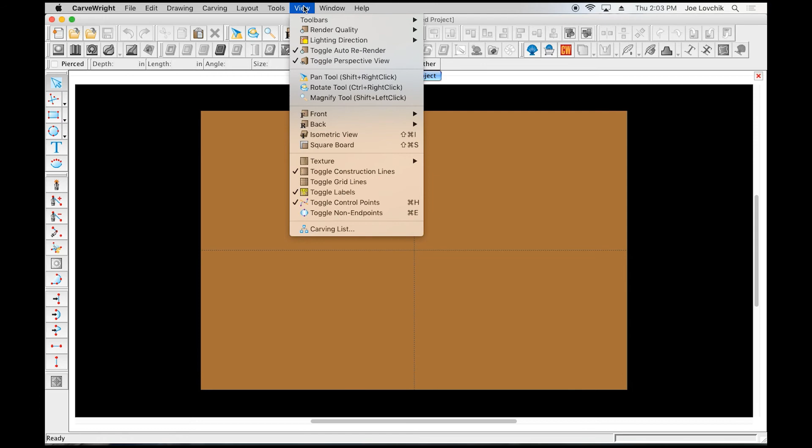So let's go and start by turning on our grid lines again, and let's actually go to layout and to snap, and let's make that interval 1/4 inch this time. Since we're using even numbers, these 1/4 inches divide perfectly evenly across this whole thing, which will be very useful here. And we're going to go up here to our snap to grid and snap to edge.

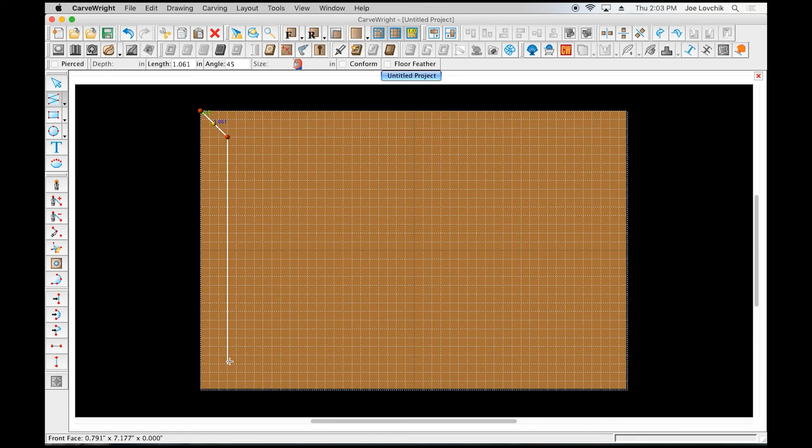And we're going to use our connected line tool, and let's go and define kind of a mitered section to a frame.

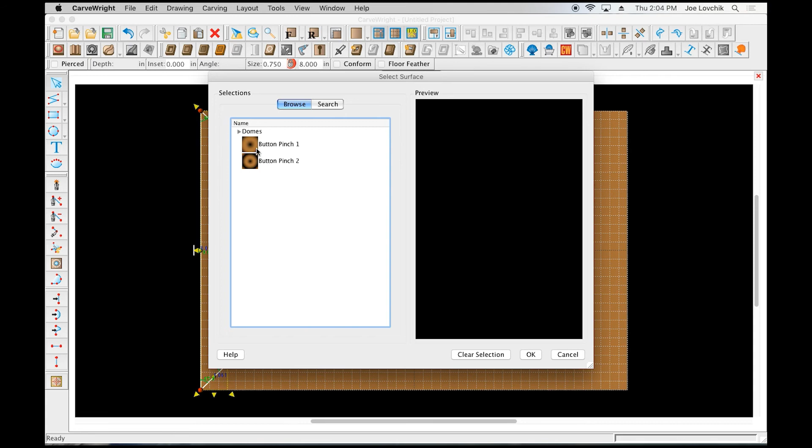Okay, so we've got this drawn shape right here that we can see, and let's apply a surface to this. So we've got this tool, it's right next to the carve region, and in between the select texture—both of those we've used—and select surface here. If you click on that, it's got a few selections of domes and other curve shapes that you can apply to things, and you can manipulate them over here to see exactly what they're going to look like.

And some of them are specific directional domes. So this one is curving from the top down. We're calling it a left dome, and then that's a right dome—it curves the other way. And since we're on this end of the board, let's take this one and apply it to this side of the board. Okay, so let's zoom in here and kind of rotate the board to see what we've got.

And it looks mostly just like kind of a flat area. You don't see a whole lot of dome to it. We're going to use our height tool. Let's enhance that by increasing that height. We'll take it to 999, which is the highest point that you can go in height.

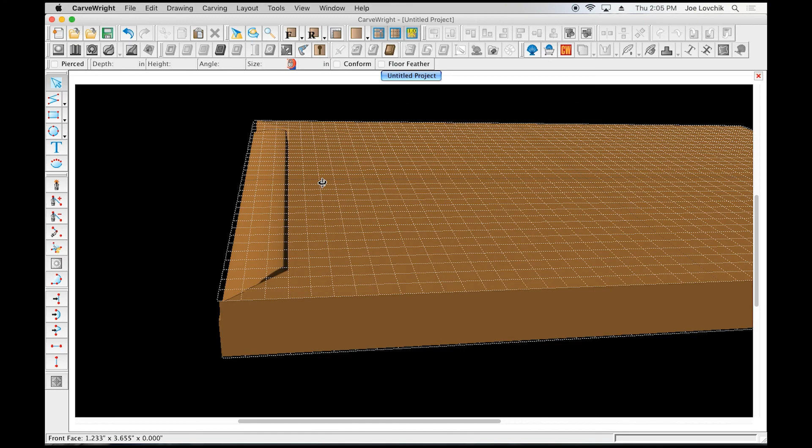And now you can start seeing that curve in the shape. Let me bring it up some more. But let's also lower that depth to 1/2 inch. And now we can really start seeing that depth.

Okay, click the F to snap it back to the front. Now we need to take this and do this to all 4 sides of this box lid, or this frame that we're making. Let's look at this—a lot of people,

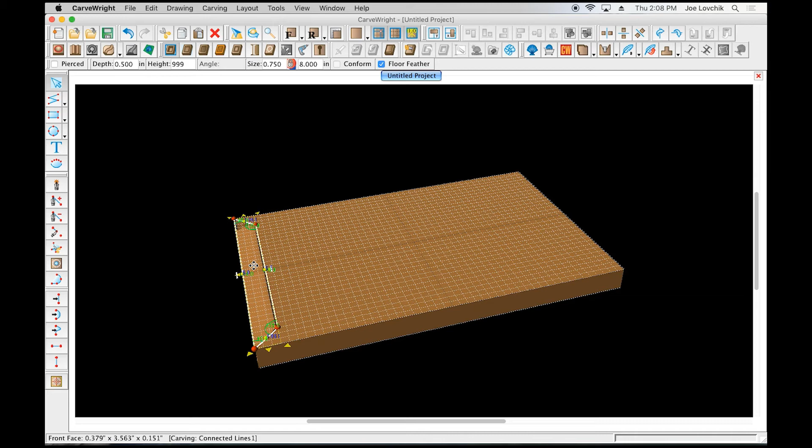their initial thought is to just mirror this, and if you do that, I'll show you what happens. Since we have selected a specific directional dome, you see that that same direction is used over here, so it's not actually creating a mirror of that. It's creating a mirror of the drawn shape, but the dome itself is not mirroring properly.

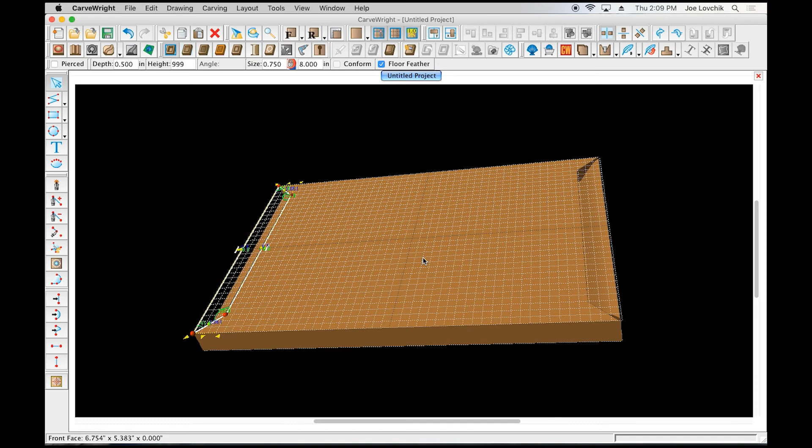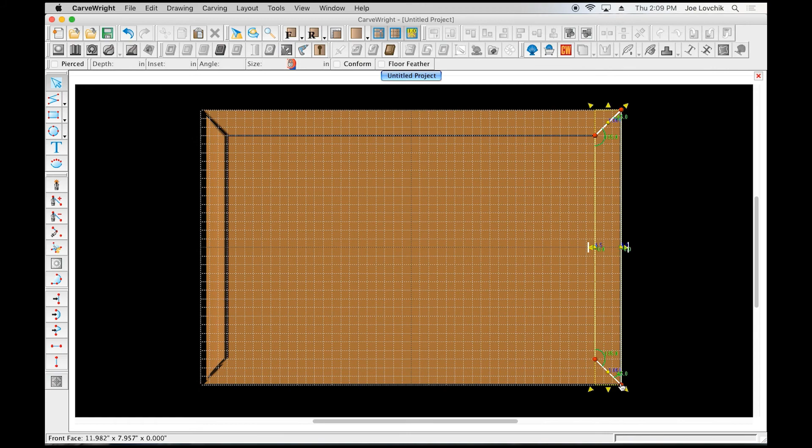So let's undo that and snap this back to the front, and let's just use our drawing tools to just draw in the rest of these shapes. And with this snap to grid, it becomes so simple to just draw all these shapes in very quickly. Make sure that they are closing, that you have closed shapes. Let me draw the last one in here.

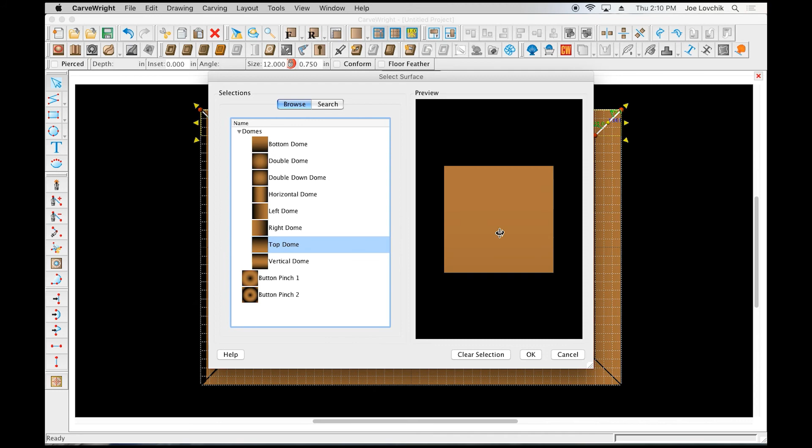Okay, let's just start at the top. We're going to go to select surface again, and then this time we're going to select the appropriate dome. So top dome, it's going from the top point down. And then we're going to select a 1/2 inch for depth, height at 999, and then just keep going around and doing the same thing to all of them.

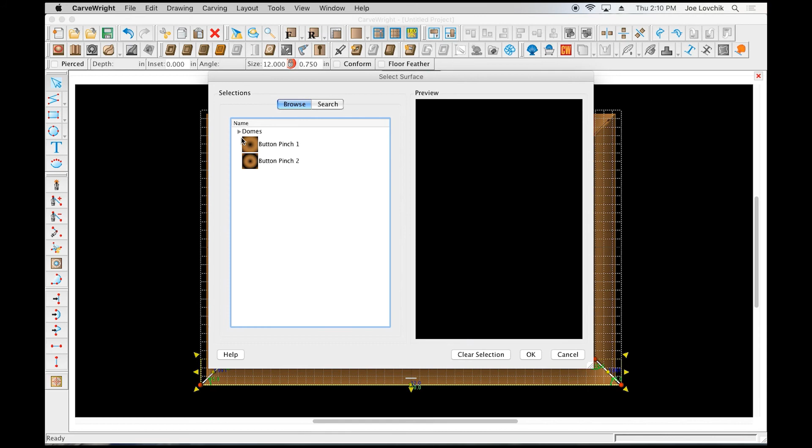So domes—this one is the right dome. Click OK. 1/2 inch, 999. Select this one, surface, and this is a bottom dome, right? Yeah. 1/2 inch, 999.

Okay, so now we can see we've got this shape wrapped all the way around. Now we're seeing some gaps show up here. There's a couple things that are happening. One, we've got to make sure that we do our optimization and make sure we turn that bit optimization to best. But you also see that there's a little lip edge here.

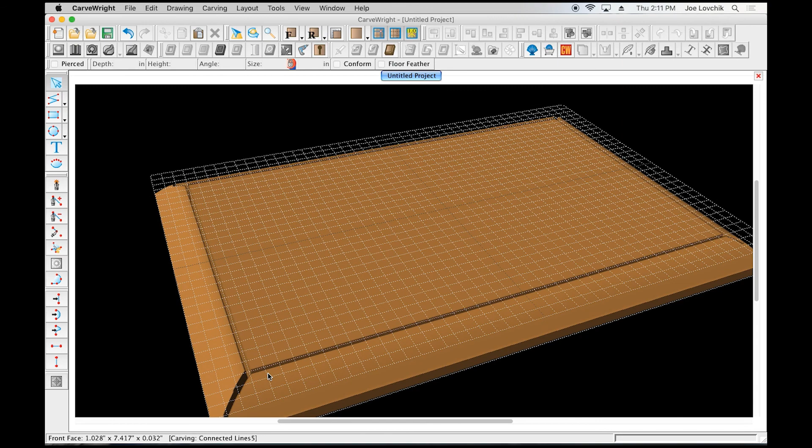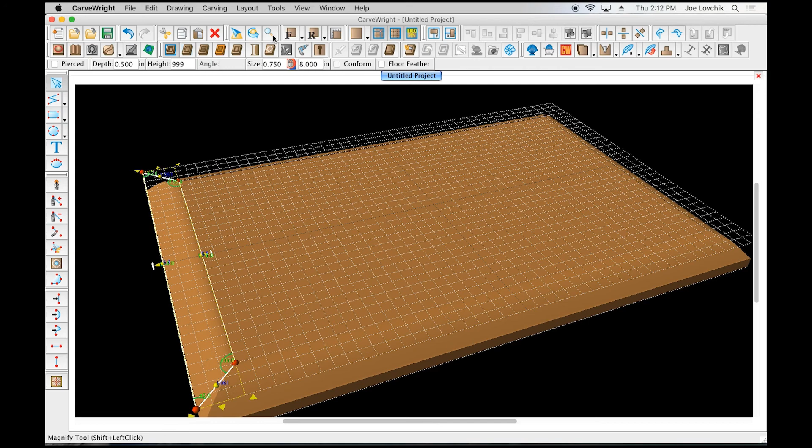So what's happening is the floor feather, and this is, I believe, just in the Designer Pro. Floor feather drops the edges—all the edges of the patterns—down to a consistent depth level, and that is so that your feathers are nice and even. But in this particular thing, we don't want those edges to be dropped down. We need them to all be at whatever terminating height that they're actually drawn in as.

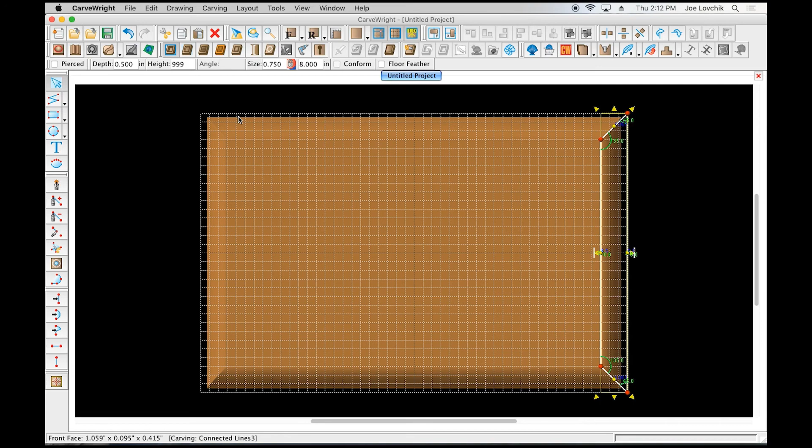So we can go through here and deselect floor feather on all those. And again, I don't believe floor feather is even in the basic software. So if you're working in basic software and you don't see this, you're probably not even going to see this problem—it's already going to be what you see now.

And let's turn off that grid just so we can see it. So now we can see that we've kind of sloped down the edges of this entire box top—some very nice shaping.

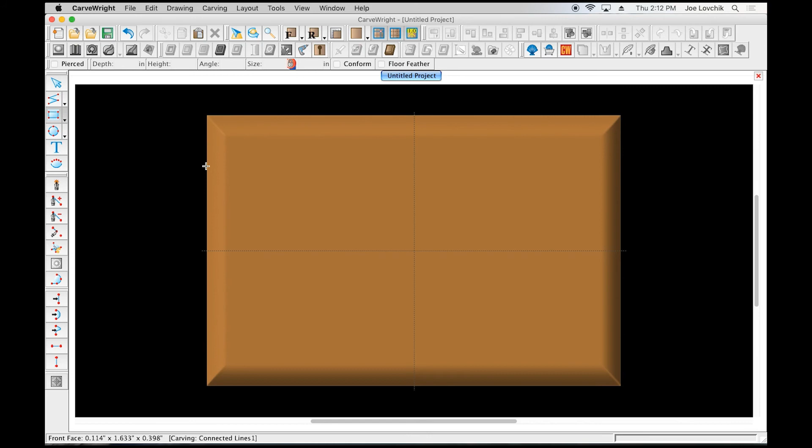So let's snap that back to the front. And let's now use our rectangle tool, and let's draw a rectangle here in the middle, and space it in a little bit.

We can turn the grid back on if we want to see it, but it'll snap even without it, and you can just visually see. So I'm spaced in here.

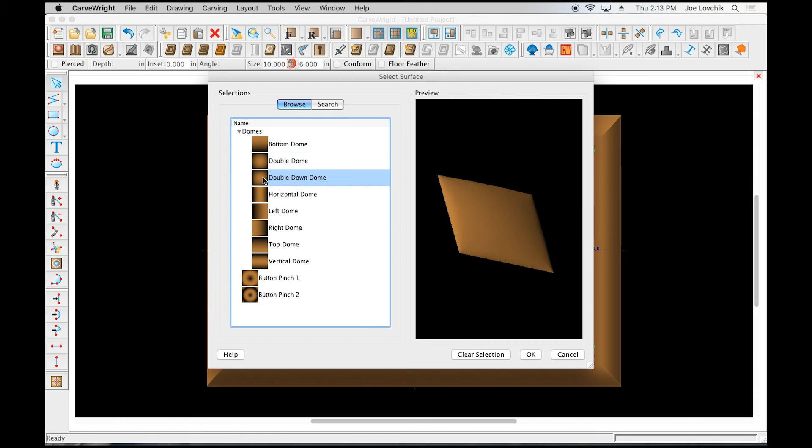Let's use the dome or surface tools again, and apply a dome in the center here. I've got a few different domes we can look at - there's a double dome, double down dome, horizontal, all of these. Let's use that double down dome and click OK.

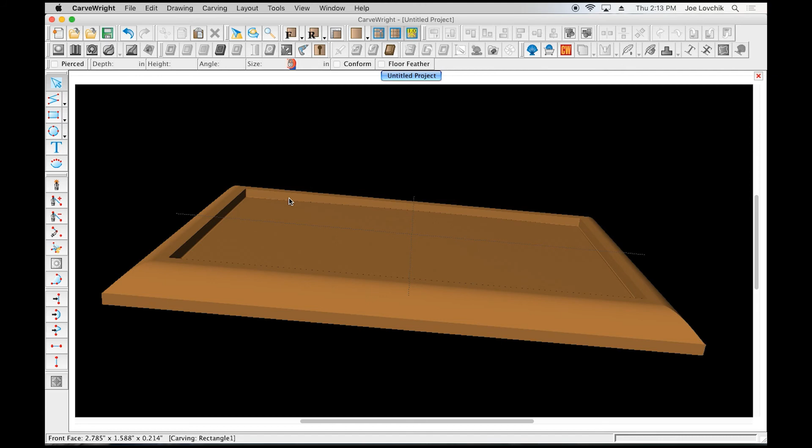Alright, so now it kind of recesses that in, a very subtle dome here. There's not a whole lot going on with that height, so we can exaggerate it by increasing it to 999. We can zoom in here and see, okay, much more definition to our dome arc there.

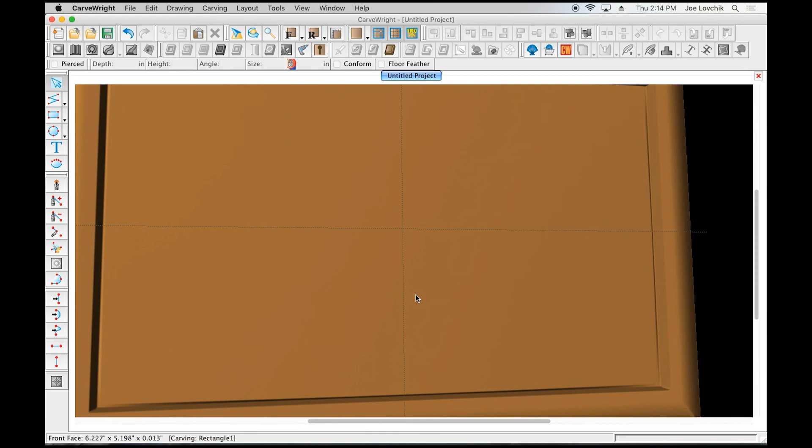Again, it looks like we're seeing the effects of that floor feather with the line on our edges here, so click on and turn the floor feather off. That means instead of dropping it down to a consistent depth edge, it'll just terminate at wherever the depth happens on this particular pattern.

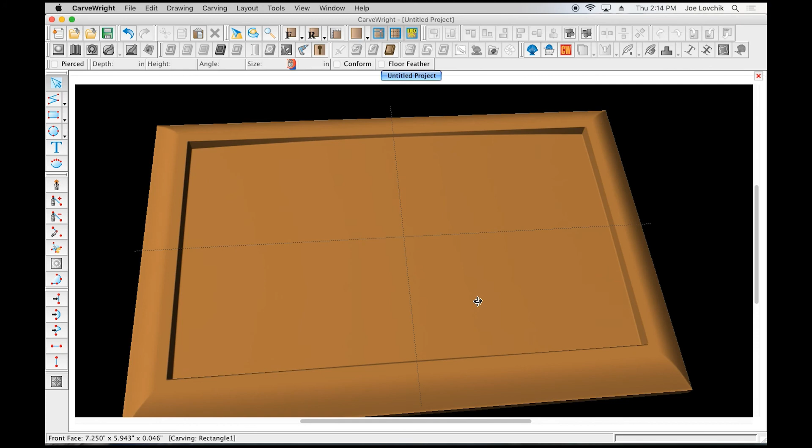And we've got a fairly nice beginning of a box top here. We can even drop this down to 1/2 inch too, just to give us even more dramatic arching and doming. So now that we have the general shape of our box top - you could be using these same techniques to make this a picture frame if you wanted, and this could just be carved out or cut out.

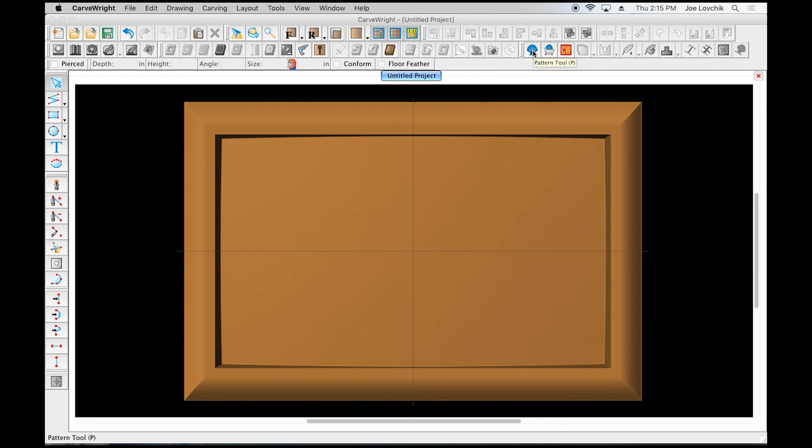But let's do some patterning - some decorative work on this particular piece and show you how a lot of this merging works. So let's click on the blue shell, go to the pattern, the basic library again, and let's go to filigrees. Filigrees are just nice little decorative pieces, easy to work with.

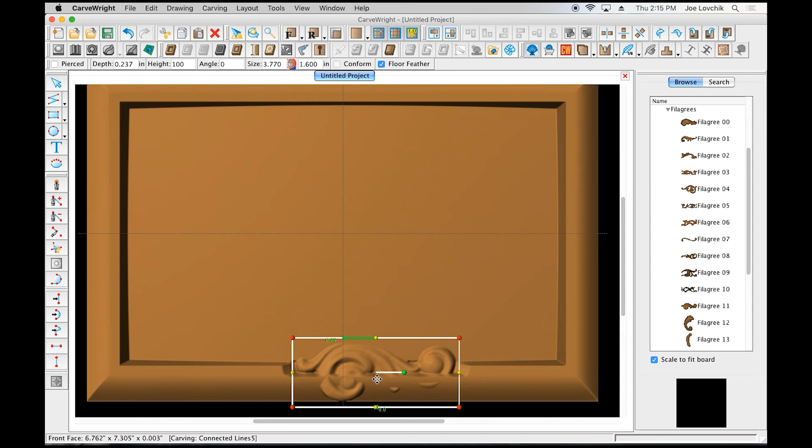Let's just go drop one on the board here, and position it so that it fits within our little dome on the edge. We might need to turn that snap tool off so we have a little more finesse on how we're positioning this. Let's turn that feather to none.

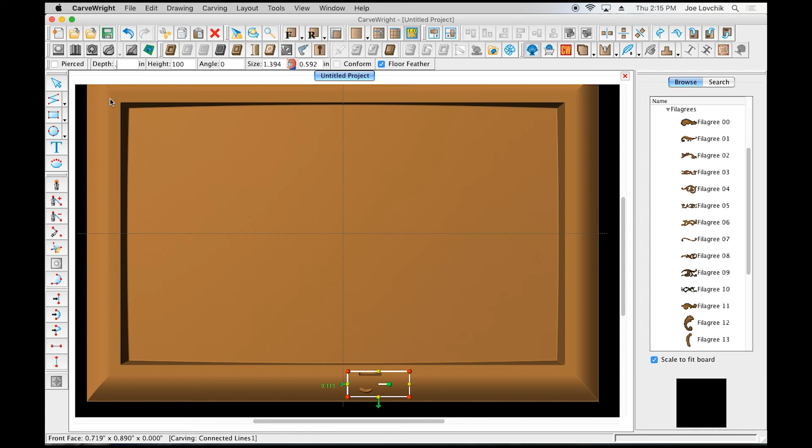And let's set the depth of this pattern at the same depth we set this dome, to 1/2 of an inch. Of course, all of this is just disappearing behind our project here.

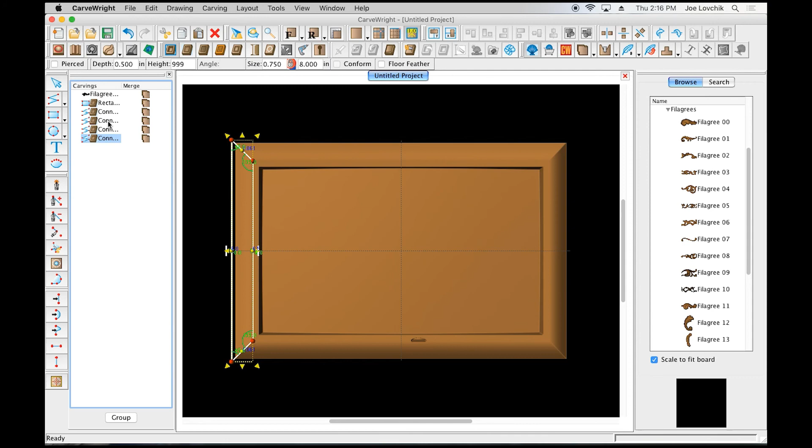But let's open up that carving list, view carving list, and let's look at that. We've got the different drawn pieces here, and let's take that bottom one - let's find it - and let's put it in a group

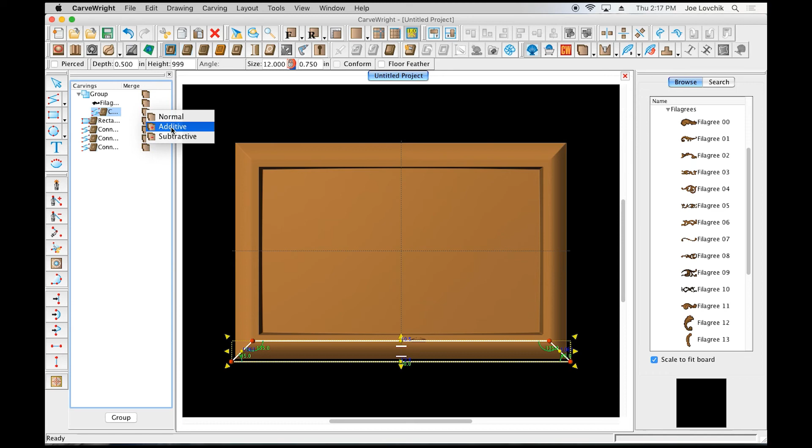with that filigree we just put there. So now they are in a group, and I can take this - not the filigree part, but just the bottom surface, the dome part we made - and over here you can see the merges. If I click on that, it gives me some options: additive, subtractive, or normal, which just removes it. If I put additive on there, it takes that pattern

and actually merges it to the curve, so you can see how it conforms to that curve shape and makes it part of that background feature we've given it.

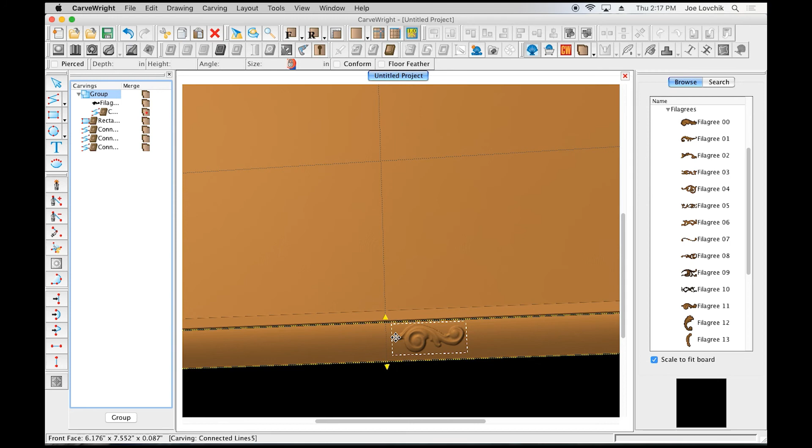And because this is in this folder, that merge is only going to affect what is inside of this folder. So I can take these filigrees and maybe copy and paste this. I've got another one here, but you see how it's outside of the folder?

If I drag it in that folder, then it shows up as part of that merge. Anything outside of that folder is not being affected. So you can get very sophisticated with your merging because you can isolate certain sections and just have certain things merge with them. So let's actually flip.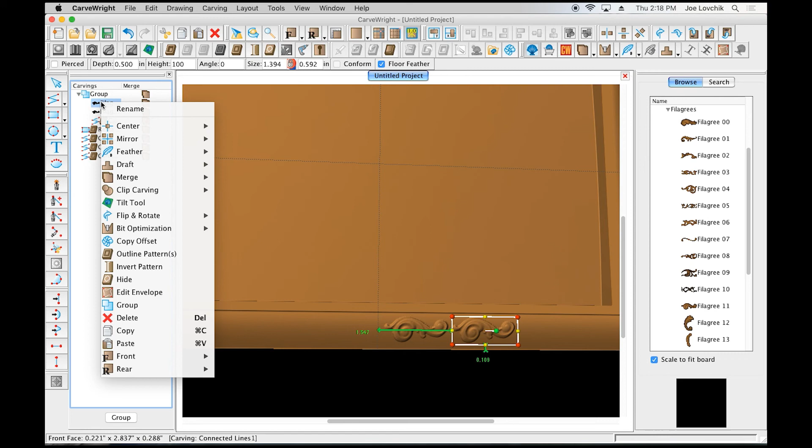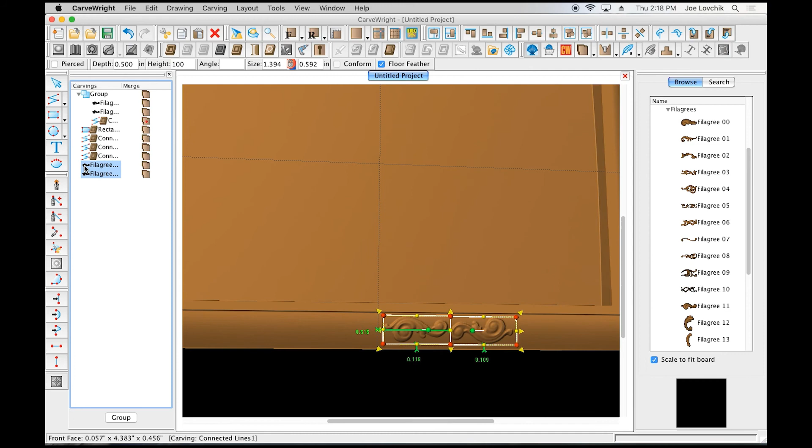Let's rotate it 180, so we got kind of a patterning here. And then let's take both of those and copy and paste them, and of course we need to drag those into our group folder again. And let's move that down, so we end up with a nice little pattern here, and we can adjust things to tighten them up so that it terminates on that edge in a fairly decorative way.

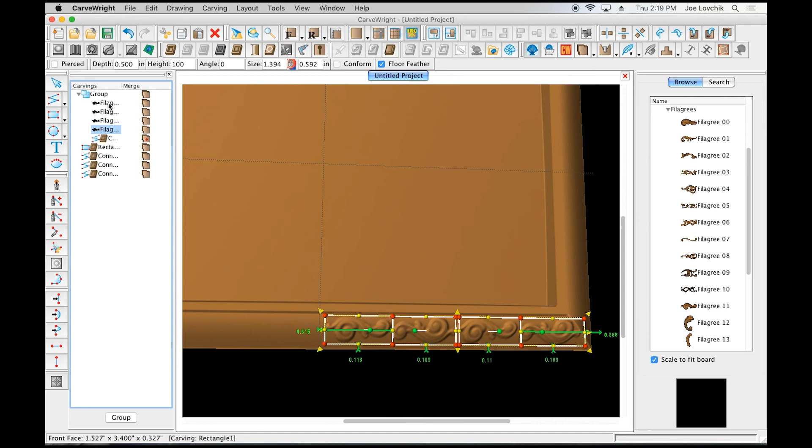And now we can take all of these, right click and let's mirror this four ways. Okay, so that gives us a lot of patterns, a lot of them that are not showing up because we haven't put them into a folder yet. So let's find which ones go where.

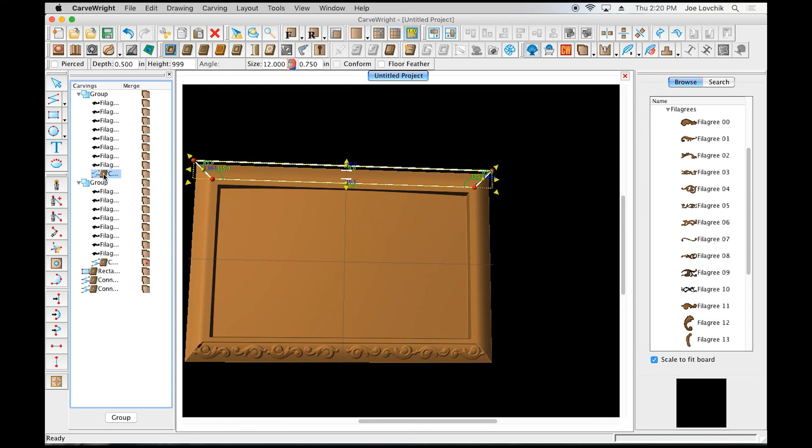So this is going to go into that folder. These ones, this one goes into that folder. This one goes into that folder, and then so on and so forth. Okay, so now we have all of these, and we need to find that top section. So let's take that top section and make a folder, and take all of those filigrees and drop it into that folder, and then take that section and make it additive merge as well.

And now we've got half of the bordering done very quickly. And looks like we could do a little bit of adjustment here. That's the nice thing about this mirroring, is that I can make the adjustments to just this one little section, and it's going to change it all the way around the entire board.

This is another reason why this carving list is so important, because you can see how it gets difficult to even select the pattern you're trying to select when you've got different background elements there.

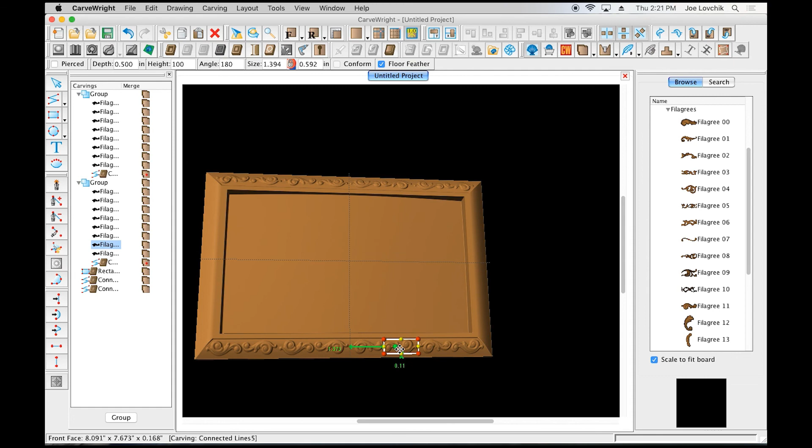Okay, I think that's probably good enough. Let's click to the front again, and let's do the same thing to these sides. While we're here though, we might as well rename our groups. We can call this one top. Rename bottom. Remember, you got to hit that enter in order to retain the name.

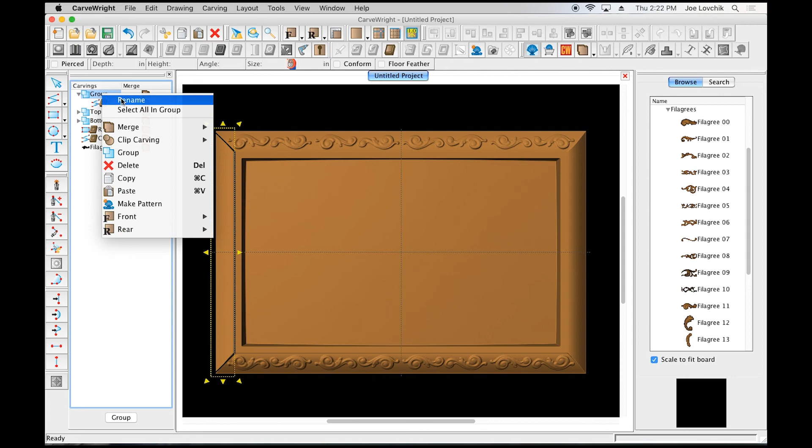And let's go ahead and copy one of these and paste it. And we'll close that, and let's take the left side. Let's make a group, we'll call it left. And we'll take this one, make a group, call it right. And then let's move this pattern.

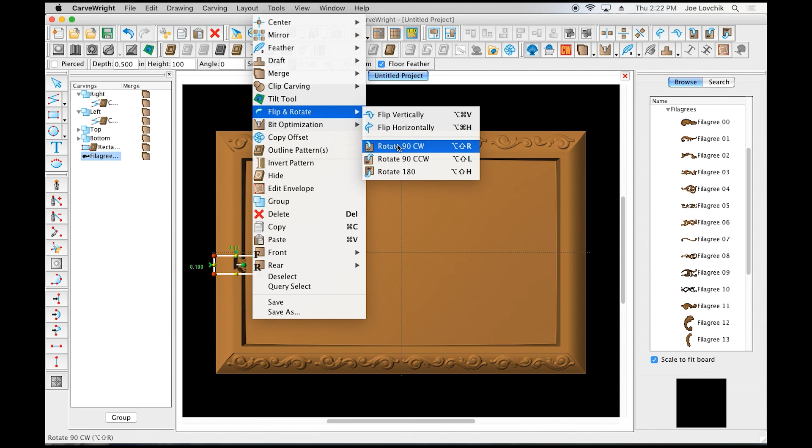And we want to rotate this, so we can go to flip and rotate. Let's rotate 90 degrees clockwise. Position it here, about where we expect it. And then this is the left side, so let's drop it into that folder.

Of course, we need to make these additive, the merges on both of those sides. Additive. Let's zoom in here and make sure our positioning looks good.

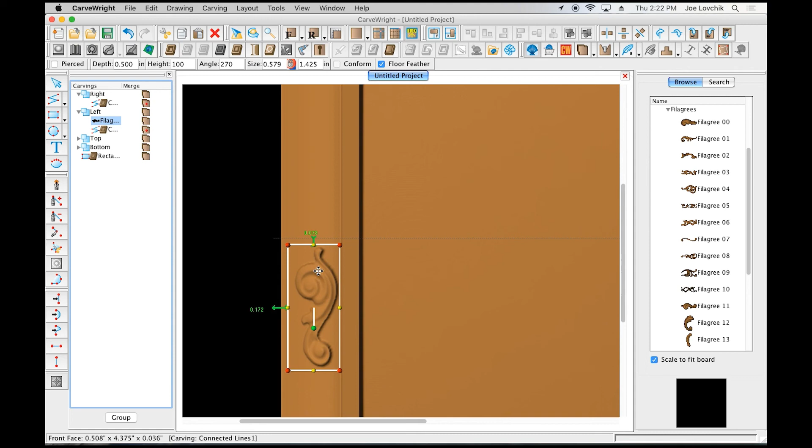And then let's do the same thing that we did on the side over here. Copy, paste, and then we did a 180 rotate.

Looks like our spacing might be a little different on this side, so got to get a little tighter. Copy, paste. Oh, exit. Let's move this over.

So this one gets a little tighter, not quite as perfect a spacing, but you can tweak it so that it looks good and it looks right. And of course, if I was designing this for carving, I would spend quite a bit of time just finessing my design and getting it just perfect, which I recommend everybody do when you're designing.

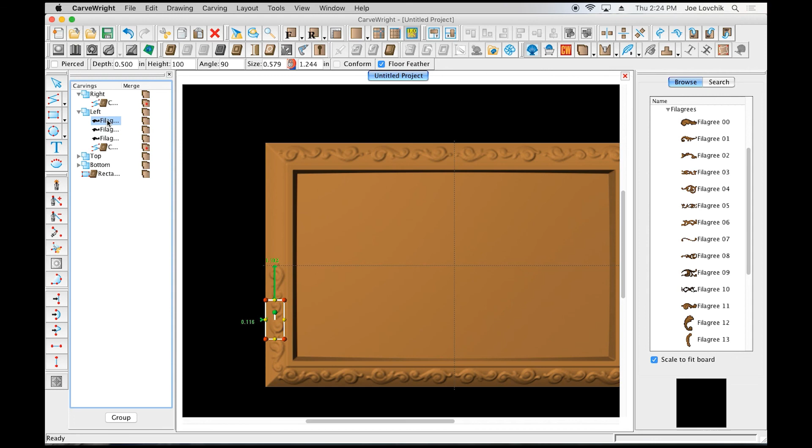Okay, so let's take these and mirror them 4 ways. And then we just need to find or apply them to the appropriate folders, either left or right.

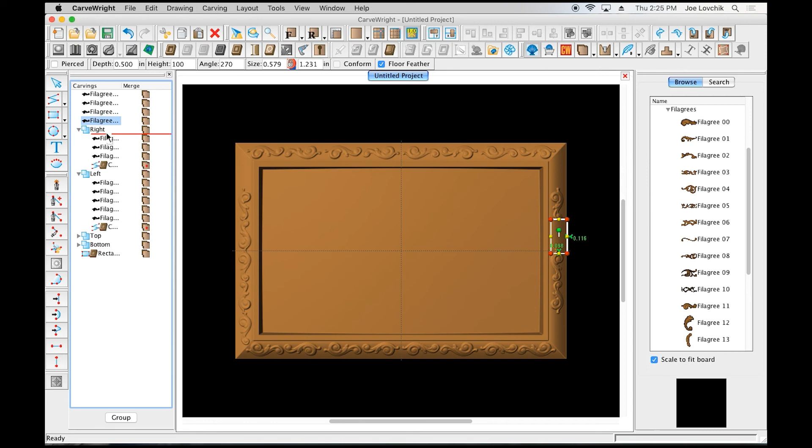And now we've got a very nice carved decorative edge to our picture frame or box lid. So let's do some more in the center here. Let's close that, and let's look. This looks like a prestigious looking piece. Let's add this shield in the middle here.

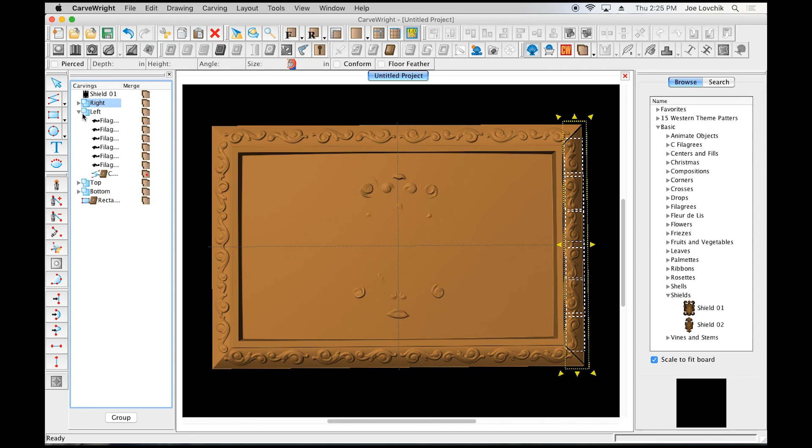Close these folders. So we're going to do the same thing with the shape we drew here, and that shield. I'm going to create a group, rename, just call it the center, and let's add that shield in there and do the same thing. We're going to make that additive, and you see how there's a big lip here? That means that I don't have these set at the same depth.

So remember, I set that background to a 1/2 inch, and that shield is coming in at 0.231. If I set it at a 1/2 inch as well, that means it's going to come from the same depth level, and it's going to rise right up just as if I had applied this to a flat background. And so you get a much cleaner look if you have consistent depths that you're working with.

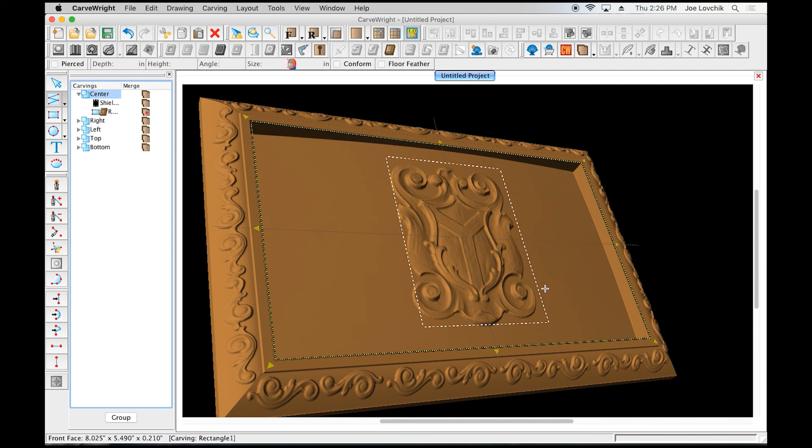Let's click back to the center there. So we're getting a very regal looking project here. Let's keep adding more patterns to this. And this is kind of the fun of designing with the CarveWright software, is you can just keep adding more and more pieces to your design and getting more and more decorative with it. So let's try putting some filigrees in here.

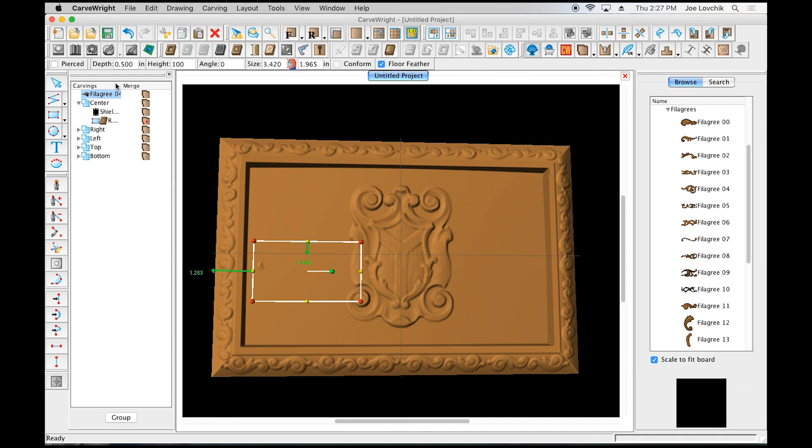Let's make consistent depths, add it to the center there. Let's try a mirror all. Of course, we got to move all those in.

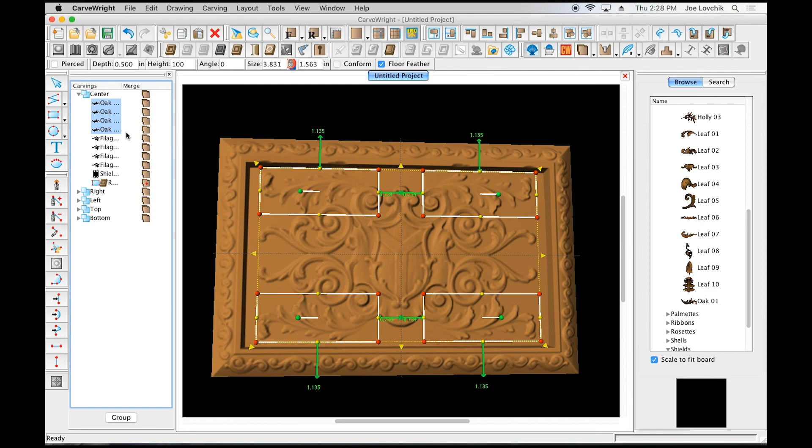Let's adjust. Let's check out some more patterns here. We've got some leaves, and I think they might be good for this particular design. Let's add these leaves in here at the same depth, 1/2 inch. Mirror all, and drop these into that folder.

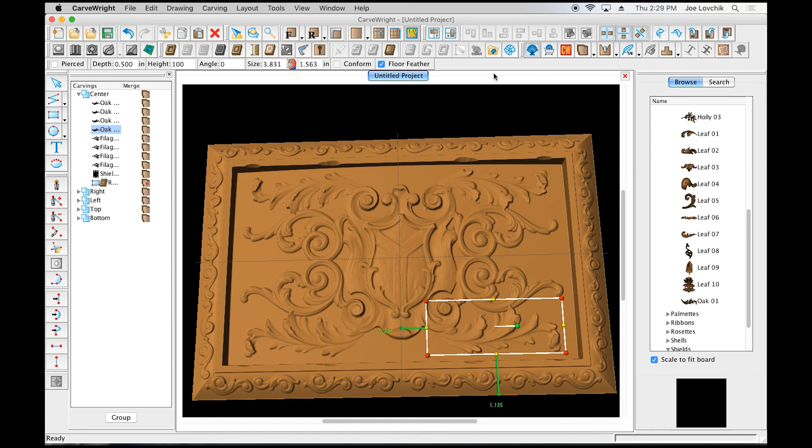Okay, we can see some interferences here with our feathers, just like we've seen in our other projects. We're using our eyes to make sure we're observing what our project is going to look like. Let's take those feathers off and remove that interference. We can zoom in and really look at this to see exactly what we're going to get with our box lid here.

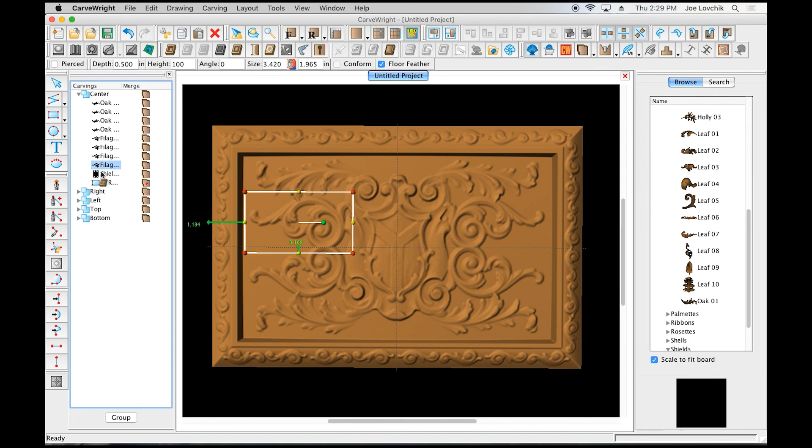Pretty nice project. I'm going to go ahead and show you some more features while we're here. I'm going to take all of these pieces, these carvings, select them all by holding down the shift button, right click, and select hide.

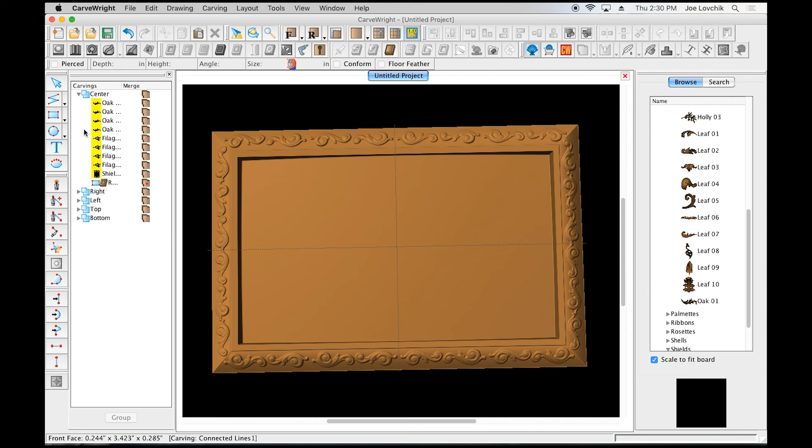When you're working on projects and want to see multiple variations, instead of starting a whole new project, you can have whole sections or folders that you hide, then put something else on there to see different variations on the same project. I use hide all the time because I'm never quite satisfied until I've seen all the other ideas I have. Sometimes my folders will have multiple hidden sections or patterns all over them, as I've tried some ideas, hid them to try a different idea, and ended up with one a few iterations later that leaves a bunch of folders hidden.

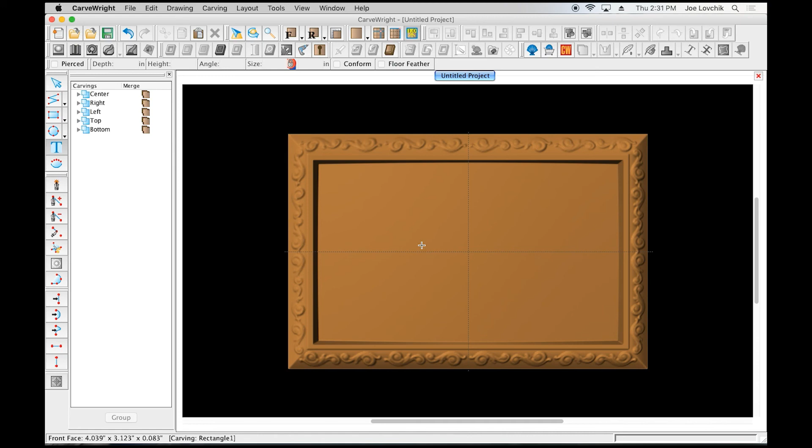So I want to show how text works with this as well. I click on the text tool, click on the board, then we choose our font and just type something out. I'll just type out CarveWright.

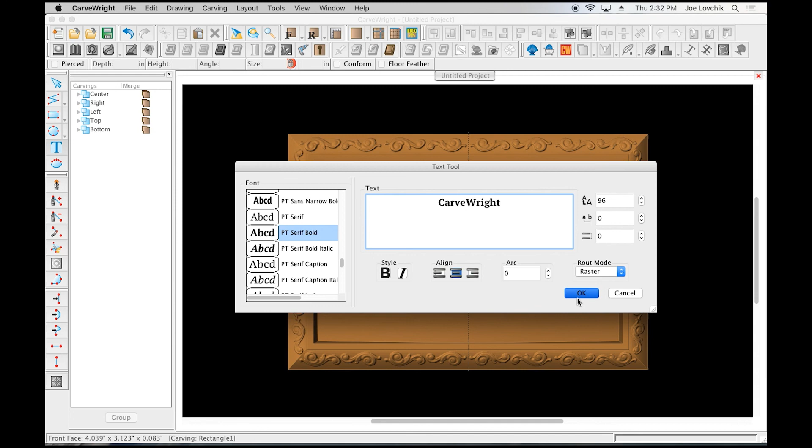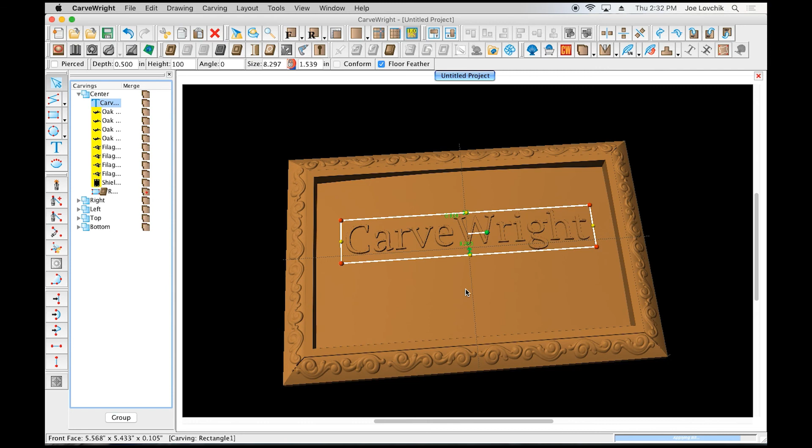If we're in raster mode, we can just click OK, and raster is going to work just like the patterns do. So if I want it to appear and merge with that, I need to set it at the same depth level, and then drag it into that folder where I've got that merge. Now it will wrap along that surface.

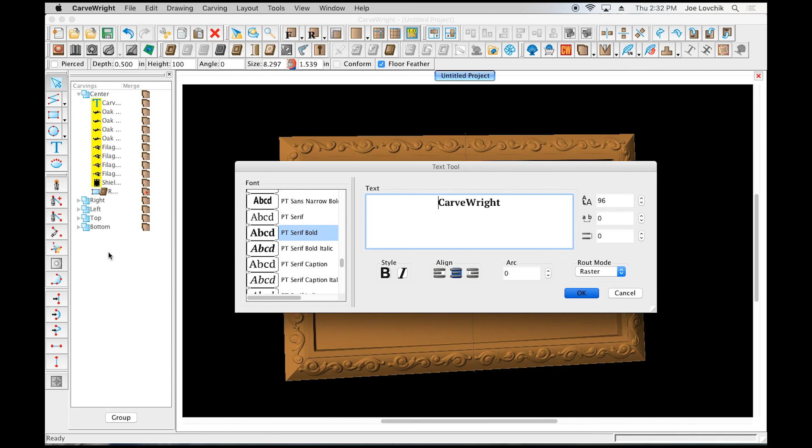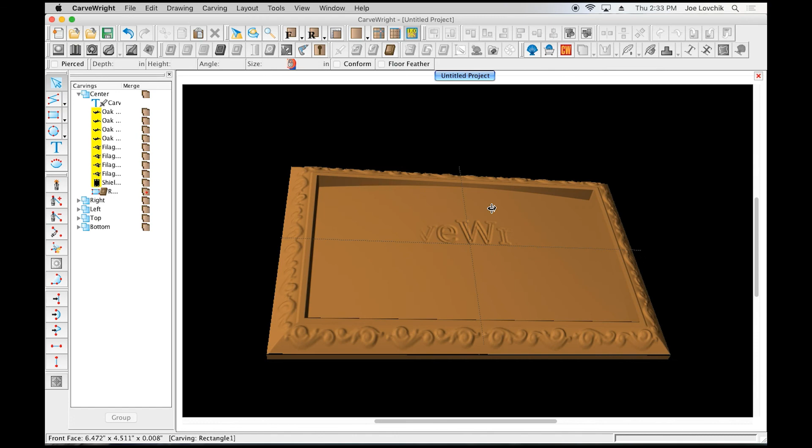But say I want to do this with one of the other styles of text. Let's right click on this, go to edit text, and select outline. We can see here that even though it's in there with that merge, outline is not working, because outline is a vector function. It's going to use that V-bit to trace over the shape rather than doing the rastering, so it does not know how to conform to that shape.

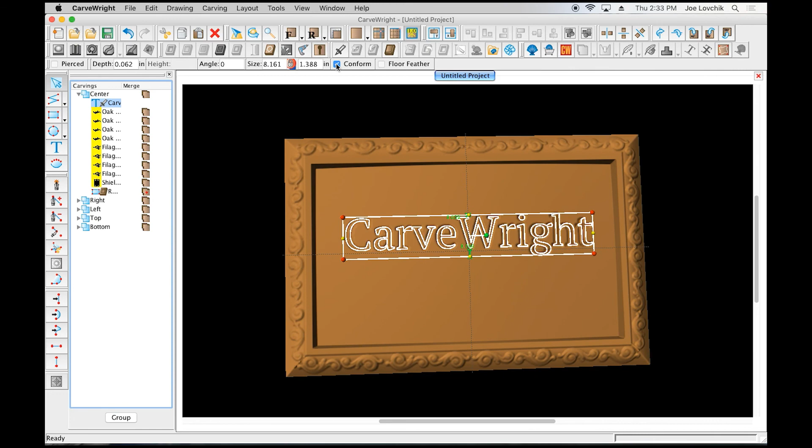So in the case of a vector function, whether it's lines we've drawn here, an outline, or centerline text, which are all vector functions, we're going to use the conform button. This is part of the Conforming Vectors add-on. When you click on that, Conforming Vectors allows those vector lines to be merged with an underlying rastered shape.

So the way the machine is going to work is it's going to carve all of this first, and then it's going to ask for the bit change. You put the bit in, and then it's going to route this into the surface that it just carved, so it will already know what this surface looks like because it just carved it.

So this can be applied to drawn shapes as well. Let's say we are creating a decorative element here, and we want to apply a V-bit to that. Let's select like a 90-degree V-groove, and let's make it 1/8 of an inch deep.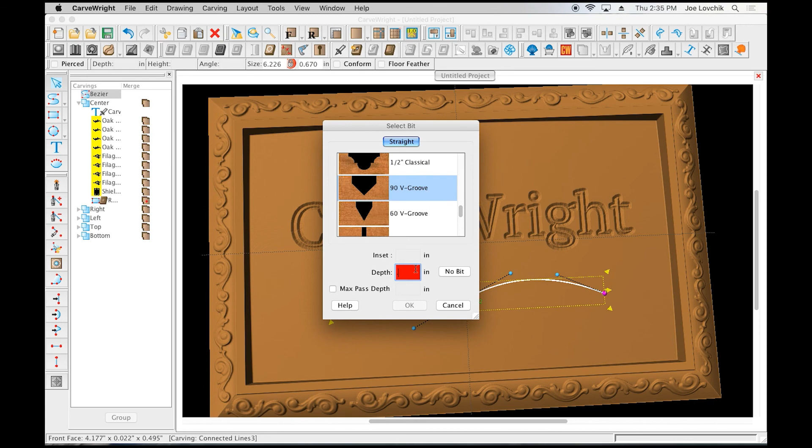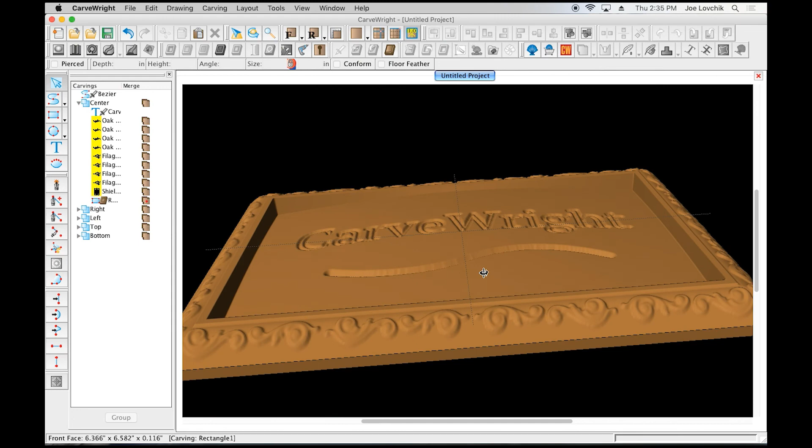Click OK, and of course it's only showing part of that line, although that ends up being kind of a nice effect on this one, but it's not what we had fully intended. If I click that conform, it will then make that entire line conform to that shape. And you'll notice it's not even in the folder.

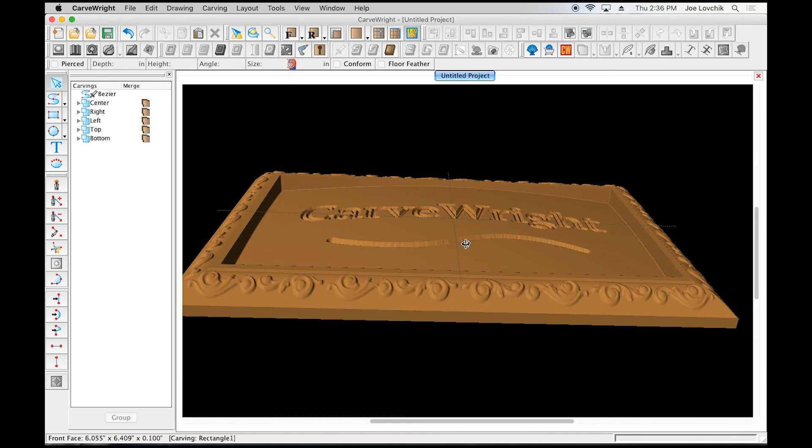So the conforming vectors feature is not specific to any folder. It's just going to take that vector and apply it to any surface underneath it, without it needing to be nested in a folder or anything like that. Okay, so that explains merges and conforming vectors.